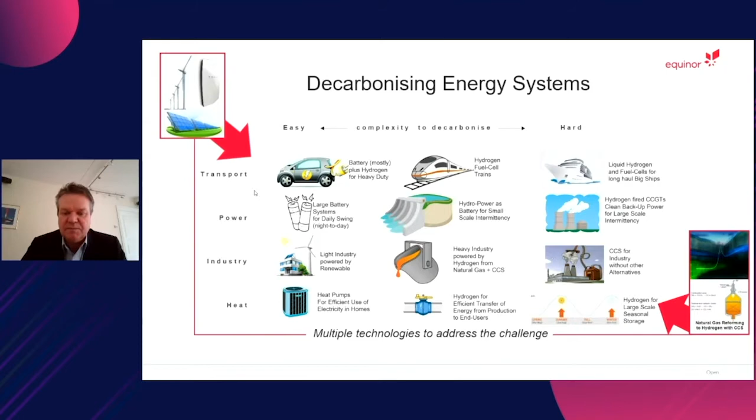So we are involved in everything from a traditional post-combustion CCS in the Teesside project, together with BP, Shell, Total, and Eni. We are planning here to install a gas-fired power plant with capture of CO2, which will make this carbon neutral and be able to respond and back up wind farms with flexible power.

And then within the CCS value chain, we also have what we call the Northern Lights project. This is innovative in the sense that it's the first time CO2 is captured in one location and then transported and stored in another location. And we make that possible through the introduction of a shipping-based solution. And these ships will start collecting CO2 in the eastern part of Norway and ship them to the western coast, where it will be permanently stored offshore, 3,000 meters below the seabed.

Of course, these ships are not restricted to only transport CO2 within Norway. We can go to any harbor in Europe, basically, and collect CO2. And we will introduce here a solution for industries in Europe, which has the ambition to manage their CO2 emissions, but don't have a storage solution today. From now on, they only need to capture the CO2, and then we can come and collect the CO2 at the harbor.

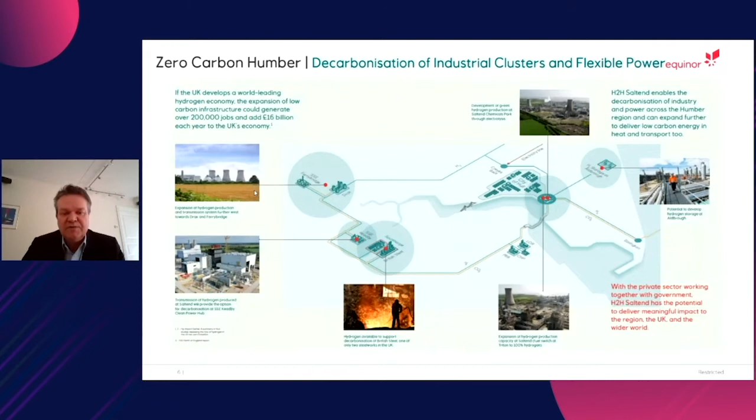And then we have as next steps in this region to expand hydrogen production to enable 100% flexible power generation from hydrogen. We also look at supplying local industry, including steel, with hydrogen. And in this cluster, we also have a power plant, which is today burning biomass imported from the US and Canada. And this CO2, which is the result after it has been burned and produced power, is considered to be carbon neutral. And we will also look into capturing that CO2. And if we store it, it will count as negative emissions. And if we utilize it together with clean hydrogen, we can basically produce artificial fuels without any CO2 footprint. So a lot of exciting stuff going on in the UK for the moment.

And finally, some words about what we can do in Norway. Today we are exporting almost all our natural gas into Europe. And of course, that natural gas can be converted to hydrogen, as I just explained. But we will also look into converting it to hydrogen before we export it. And then we can export it as mainly blue hydrogen. And by building this blue hydrogen value chain, we can, over time, gradually phase in more and more green hydrogen as we develop, for instance, offshore wind production.

The beauty of doing this in Norway and potentially building a new pipeline is that we can connect this pipeline into what we consider to be the hub of hydrogen in Europe. And today it looks like the Groningen area in the Netherlands probably will have such a role. It used to be Europe's largest gas field, and it is expected to be almost closed down by the end of this decade. That will free up a lot of infrastructure today carrying natural gas. In the future, it may carry hydrogen. And if that is going to be the case, that's something we can connect to from Norway and be part of this system as a supply chain.

So there's a lot of exciting stuff going on in hydrogen. We believe that building on the existing natural gas infrastructure is the way to start. To convert this to hydrogen, we need large scale. And we can get large scale early by introducing blue hydrogen. And then when we have done that, we can phase in more and more green. And then as an end game, we believe green will be the solution for the future. But it's going to be several decades before we are there. In the meantime, it's very important that we can lift this based on clean blue hydrogen based on natural gas with CCS.

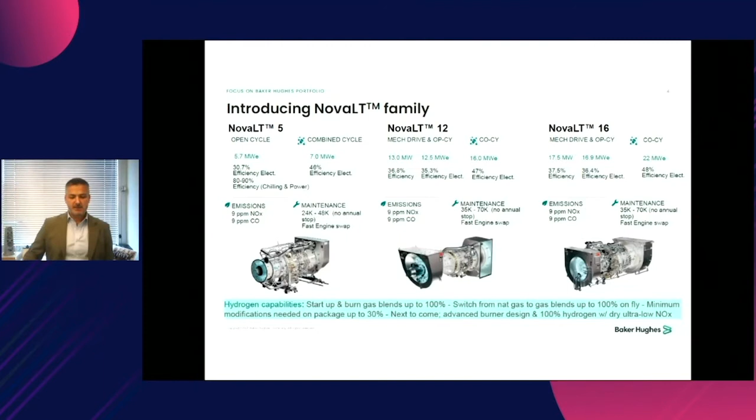We are creating a system around these turbines that will be able to follow the industry evolution from 100% natural gas to 100% hydrogen in steps. And we are designing a system that can easily carry 10-20% hydrogen, and we are advancing the technology to go up to 100%, without compromise on the maintenance needs and clearly the simplicity of operation that is the characteristic of this turbine.

In this respect, I would like to talk a little bit about an experience we had with one of the most historical pipeline companies in Europe, which is NAM. I know that there will be a dedicated paper on this experience in another section of the symposium, but as NAM and Baker Hughes test for the world's first hydrogen blend turbine, we actually took an actual product that is going to go in an actual NAM project, and we tested it for higher blends of hydrogen, up to 10%.

And the meaning of this test goes above the result of itself. It's the commitment that both NAM and Baker Hughes are showing in regards of cleaner fuels, and getting together, instead of doing a separated development, allowed Baker Hughes to partner with a major operator, and NAM to get access to a very important technology provider. That made this development not a lab one, but a real life example that is proven on the field and that can be applied very, very easily to other projects.

In particular, clearly, we have also a lab dimension for that, which is the combustion system. We all know that the biggest difficulties for hydrogen would be in the combustion physics, but of course we are also looking at the package and auxiliary design and operability. In order to cope with this problem, we set up a dedicated combustion test facility. It's in Sesta, Italy, in Tuscany. And basically, we use that in conjunction with the virtual lab test to prove on a full-scale mode the combustor we will use for hydrogen. And also, we set up a dedicated line of additive manufacturing in order to fast prototype and very quickly prove our technologies.

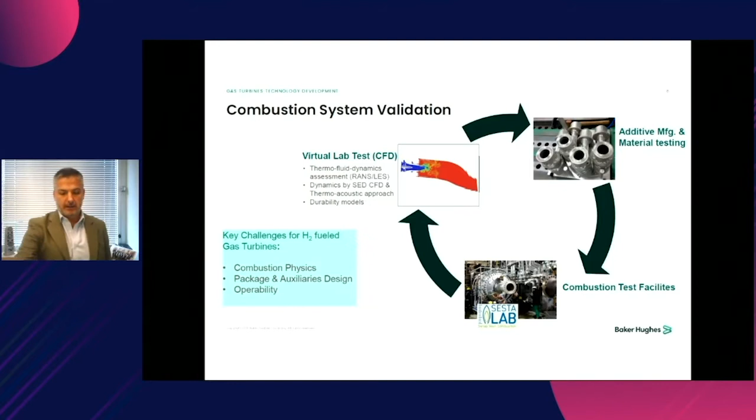Having said that, I was reflecting with my team on why we are doing that. Clearly, our goal is to help new fuels to develop. It's something that can only happen in common, in partnership with all the operators, with all the industries. But the opportunity is very big. I try to make a simplification. We have, as Baker Hughes, approximately 100 LM2500 gas turbines driving compressors in pipeline applications. If we will be able to burn 30% hydrogen in each one of those, it's like taking 300,000 passenger cars every year off the street.

And this is a very small section of all the fleet that we have in the pipeline world and all the fleet that everybody has. So you may imagine how big a contribution. It's like stopping all the cars of a medium city like Florence. So very big opportunity.

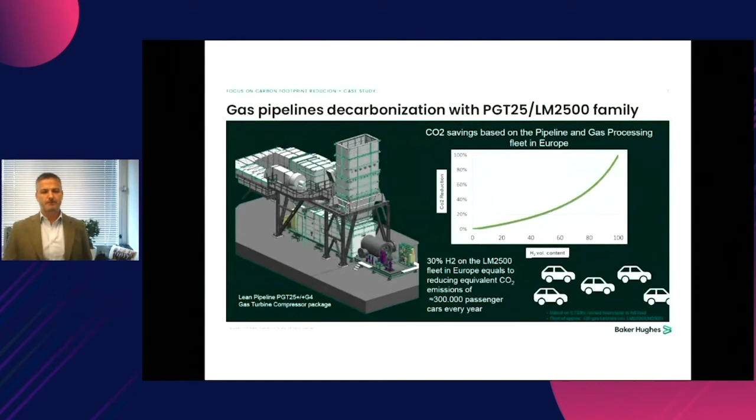And that gets me to the closing of my presentation, because the reflection that I would like to bring is that we as Baker Hughes are very committed to help the world reach its decarbonization targets. It is very clear while we develop our product and our solution that we can only do it in partnership with the rest of the industry. At the same time, if we get together as an industry and we apply the technology, the solution, and the commitment, I think we can really move the needle and help the world reach the very important target of reducing global warming.

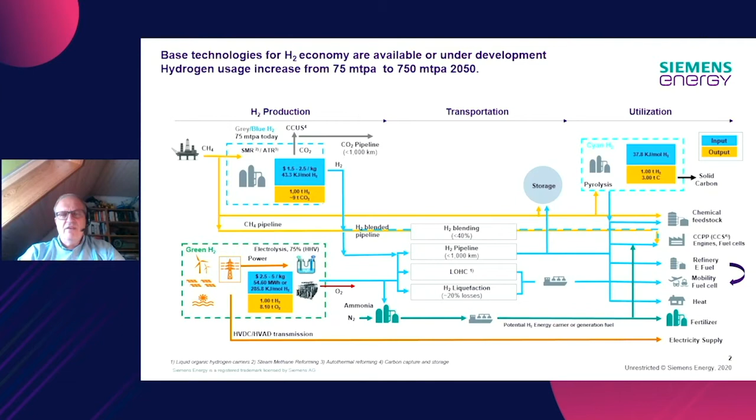Next page, basically, I want to explain a little bit about blue versus green hydrogen. I repeat myself, 75 MTPA is produced today. More than half of it is used to make ammonia, and then out of ammonia, mainly urea as fertilizers. 33% go into refinery for desulfurization of fuel, and maybe most of the balance goes into methanol production. And normally the hydrogen is produced basically where it's used.

Also, we have some existing hydrogen pipelines already, small diameter, low flow in North America and in Europe. When we forecast that the production of hydrogen may increase 10 times until 2050, it's very clear to do this with electrical energy only, with green hydrogen, you would need more than 40,000 terawatt hours, equivalent to the output of 15,000 wind parks, 1 gigawatt each. Therefore, it's clear to everybody to build up this infrastructure takes a long time.

Therefore, it can be assumed that even in 2050, a substantial amount of the hydrogen still comes from natural gas, as in blue hydrogen. And technologies to decarbonize the hydrogen production are available and just need to be applied. And at the end, if you make a molecule of hydrogen in a steam reformer and all the CO2 is extracted and stored, I think a molecule of blue hydrogen is as green because it has no CO2 emissions.

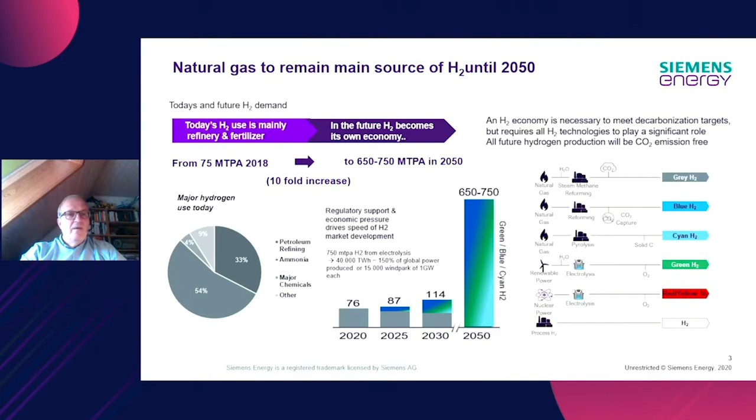Okay, then coming back to the equipment required for hydrogen infrastructure like pipelines and storage equipment. Here you see basically a complicated map of all the applications we have already. Because I repeat myself, hydrogen is used in industry since decades. Hydrogen is pumped mainly with reciprocating compressors today. We have existing pipelines for hydrogen, also low flow, comparable to natural gas pipelines as well, mainly using turbo compressors.

We have available already gas turbines that can run with hydrogen fuel up to more than 60%. And we have, of course, all the technology required to capture the CO2, pump the CO2, inject the CO2 as well. You need compressors or pumps. And we have also high flow, hydrogen-rich syngas applications in various petrochemical facilities. So basically, you can say all the equipment required for hydrogen infrastructure and pipelines and storage is available, except high flow turbo compressors for hydrogen as a point here, and I come to this later.

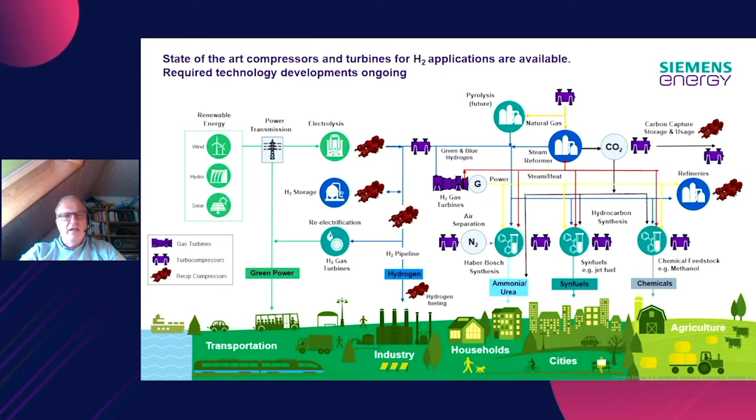Before we continue this, we need to talk a little bit about the difficulties to pump hydrogen. Hydrogen with a low mole weight of 2 is basically the most difficult gas to compress, in particular in turbo compressors and the way they operate. Hence, basically all the hydrogen today is pumped with reciprocating compressors. Reciprocating compressors, by the nature of their working, have 15 to 20% better energy efficiency than turbo compressors.

And studies with pipeline companies show that up to a volume flow of 750,000 norm cubic meters per hour with 3 parallel units, what is equivalent to the output of a more than 2 gigawatt electrolysis system, reciprocating compressors can be economically applied. Of course, for higher volume flows, and we see already inquiries in this direction in the planning for very large hydrogen systems, we need turbo compressors.

In order to have turbo compressors where in a single casing the typical delta P of a pipeline compressor station can be bridged, new impeller technology needs to be developed where the tip speed of the impellers is higher than 700 meters per second. This has certain challenges in the materials and the high centrifugal forces, but developments are ongoing,

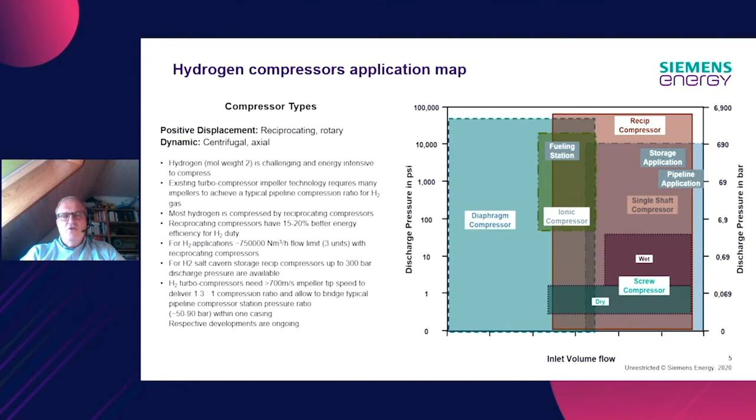and I'm very sure that before we ever have to pump more than 750,000 norm cubic meters, those compressors will be available, and we will be able to offer equipment where in a single casing with maybe 4 impellers, I'm not sure yet exactly what output is, the pipeline operators can bridge the typical delta P you have in a compressor station.

In this picture, what probably many of you know already, you see the map of the plan of the European long-distance pipeline operators of the so-called European hydrogen backbone pipelines. It's quite extensive. More than 75% of those pipelines will be repurposed natural gas pipelines and only 25% new build. And the first studies undertaken show when you repurpose existing natural gas pipeline to hydrogen, the investment cost is only 10 to 15% of a new build. So basically, it could be done with reasonable investment, relatively short term.

A hydrogen pipeline has roughly 90% of the energy transportation capacity of a comparable natural gas pipeline. Also, it requires substantially higher compression power to do this. But we also need to keep in mind at the beginning, when certain pipelines are repurposed for hydrogen, they may not be utilized with their full capacity.

And if maybe the capacity in a pipe is only 10, 20% of the maximum, the required compression power is pretty low, and you can bridge very long distances with a single compressor station at the beginning. Then, when the flow increases, it gets vice versa, and you need more compression power than in natural gas.

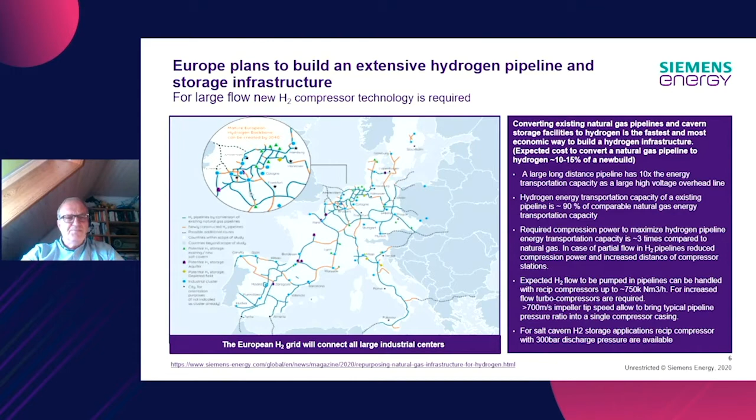When we talk a little bit about what needs to be done to enable hydrogen flow in pipelines from a rotating equipment point of view, we can say when you have an existing pipeline and you blend, as long as the hydrogen content in the flow of the pipeline is less than 10%, basically for the rotating equipment, no changes are required. They lose a little bit of their performance. And of course, maybe you need to do some new approvals on the checking of the safety guarantees, but from the rotating part and performance, it can work as it is.

When the hydrogen in the mixture goes up to 40%, you can change the inner bundle of the compressor to enable a certain efficiency for the mixed flow. And it's fair to assume that most of the gas turbines you typically have installed in a pipeline can already use hydrogen fuel to a certain percentage, or can be respectively upgraded to do so. But when you increase the hydrogen content above 40%, you need new compression equipment. And we talked about this as well, what that means.

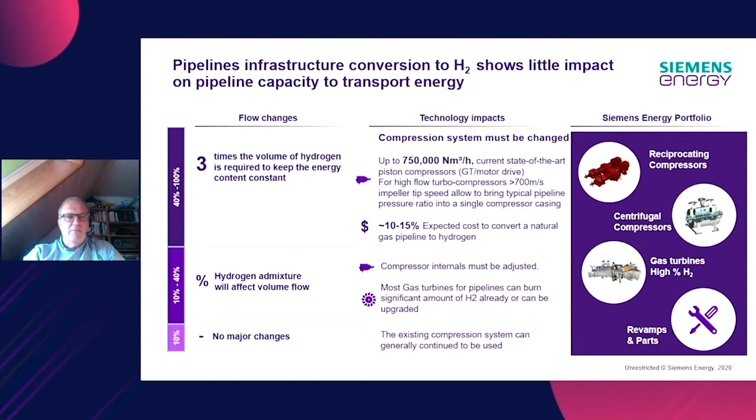Again, from what I see at the moment, the pipeline operators tend to say, I will have a separate network. I do not see very much blending happen, but we still may see something of it. And then we have basically the infrastructure established between dedicated hydrogen and natural gas pipelines. Of course, the equipment is available.

Here you see the picture of a large reciprocating compressor for hydrogen application. There are plenty of references in this available from us and other suppliers. So basically, it's a very well-proven technology. I know, of course, that the European pipeline operators, for whatever historic reason, have not many reciprocating compressors in operation and have not much operational experience. But this technology is very well proven and widely used in North America. So it's basically available. And if someone needs hydrogen compression today, that is a choice he needs to have.

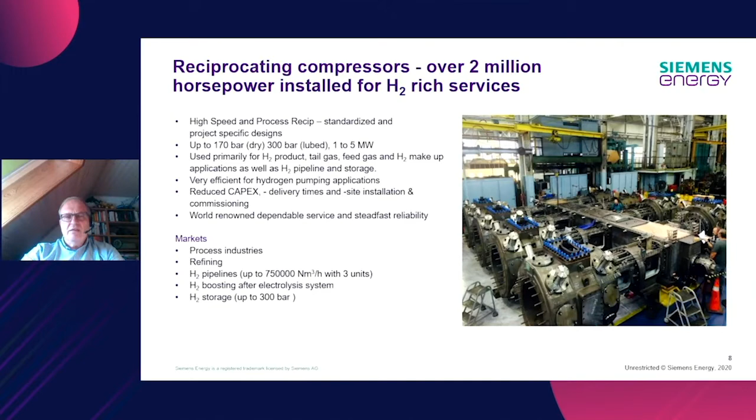Of course, we have today already compressors for hydrogen up to very hydrogen-rich components, so-called syngas compressors in petrochemical processes. But in order to achieve a reasonable compression ratio, maybe from 50 to 90 bar in a pipeline, we would need 3 casings with more than 20 impellers, and respective technology is developed to put this all in a single casing, as the pipeline companies need to have.

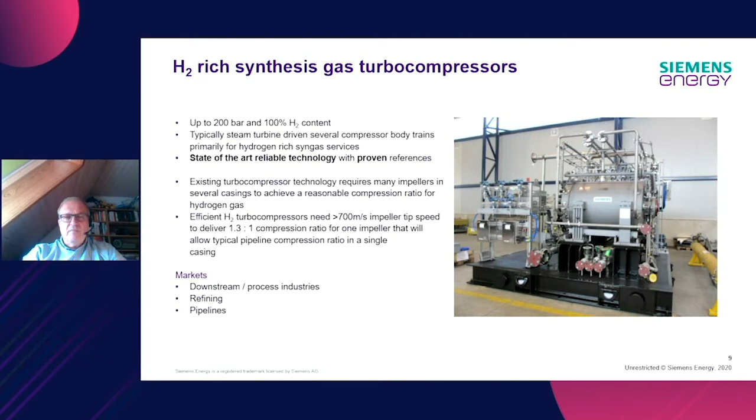And it's fair to assume that in a very few years, the typical megawatt range of gas turbines for pipeline operation can be fueled with 100% hydrogen. We from Siemens side prefer to do this with so-called dry low emission burners, where we keep the NOx emissions in the gas turbines under control with dry low emission technology. Although already today, the so-called wet low emission technology is available, mainly used for aeroderivative gas turbines, where you inject water into the gas turbine in order to keep the NOx emissions under control.

But to give you an example, for a 35 megawatt aeroderivative gas turbine, you would need roughly 15 tons of demineralized water to keep the NOx level we have here in Europe. Therefore, it's perceived by many customers as not a viable option. So again, in a few years, I would say 2-3 years, the typical megawatt range for pipeline gas turbines will be available with very high, up to 100% hydrogen fuel capabilities.